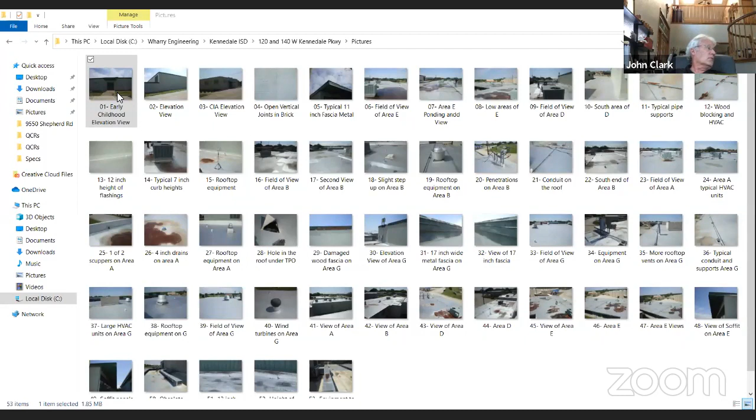Okay, let me try this again. I'm looking at share screen at the bottom of the screen. So that's what I would click, right? Yes, and then I think it'll ask you what you want to share. What do you see now? Oh, I think it'll say like screen 1 or screen 2 if you have 2 monitors. Let's see. Something's happening here. It's going back to the same thing. We're back to the same one. Okay.

I might have to get some help here. Just new share. So you're still not seeing it.

Okay, let's stop. Can you just take us through the process of what you went through as far as why this roof, and when we talked about picking the best roofs for what we have, why you feel like this is the best roof for what we need.

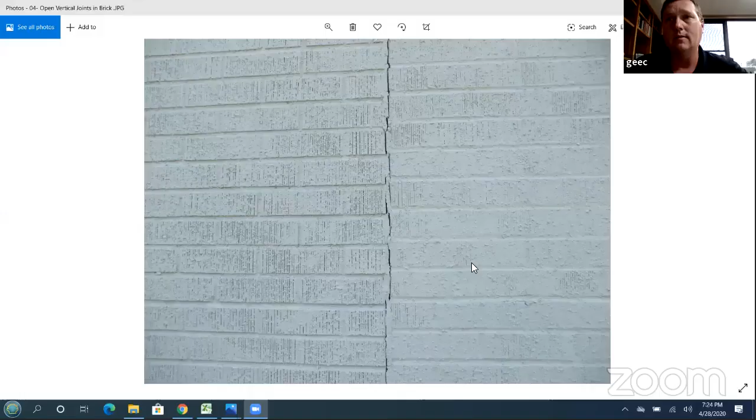They're the ones we contracted to create the specs and look at what they recommend as our best roofing system. Robert Gabois is on with us also—he was the one who originally came in, and when we were talking about the metal roof system, said you may want to get somebody else out here to look at your roof.

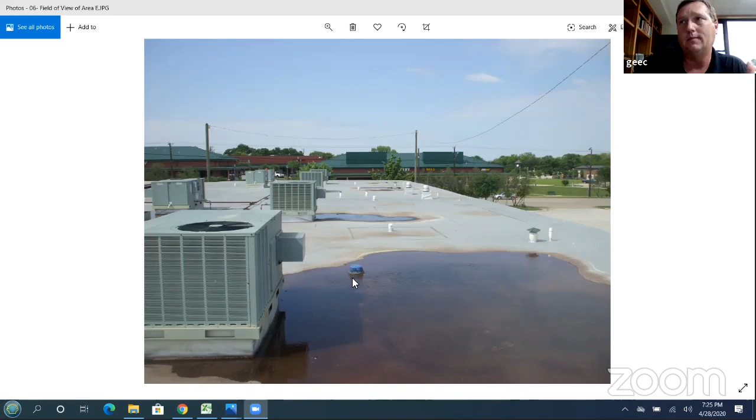He originally said you may want to rethink this, because as far as the weight of the metal roof, how compromised are these wood trusses? That's what led us into bringing in a roofing engineer to design what we need for these types of buildings.

As you can see, you have some cracks on the vertical walls, which we plan to address within our specs and drawings, to assess all of these vertical joints and cracks around the perimeter.

This is that area E I was talking about—I believe it's the pre-K section, on the end towards the playground, towards the hill up top. As you can see, there's quite a bit of ponding. The drain was dropped there, but it's not working properly either.

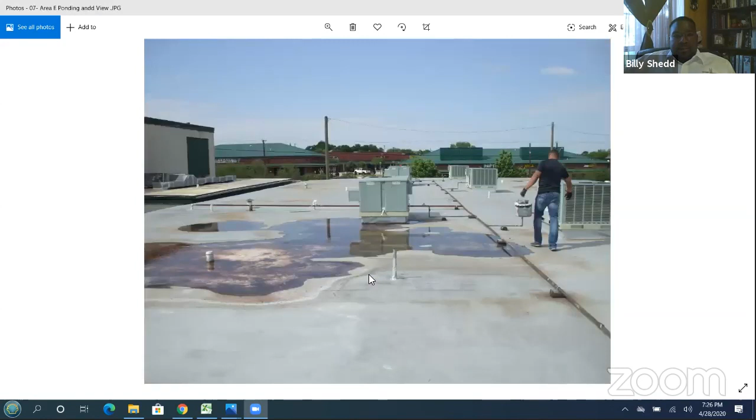These are just typical pictures. As you can see, these little spots and things here are typical evidence of water sitting there for quite some time, so the slope is very minimal.

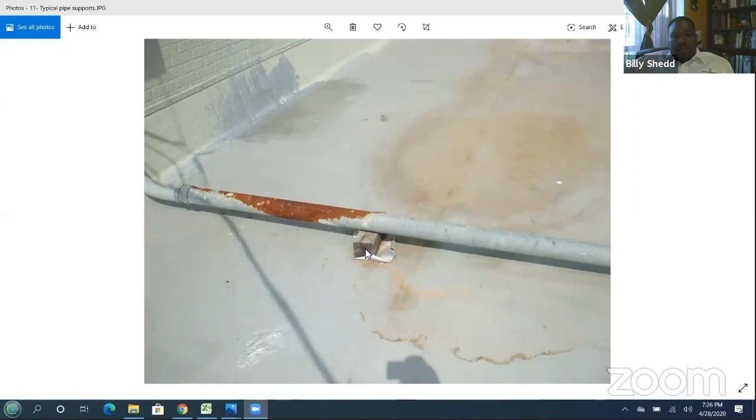These types of pipe supports—we're doing away with the wood because over time, like any wood, it tends to deteriorate and no longer supports the roof or the pipes and conduit. So we're going to actually put what we call pipe rollers underneath these. Same thing here.

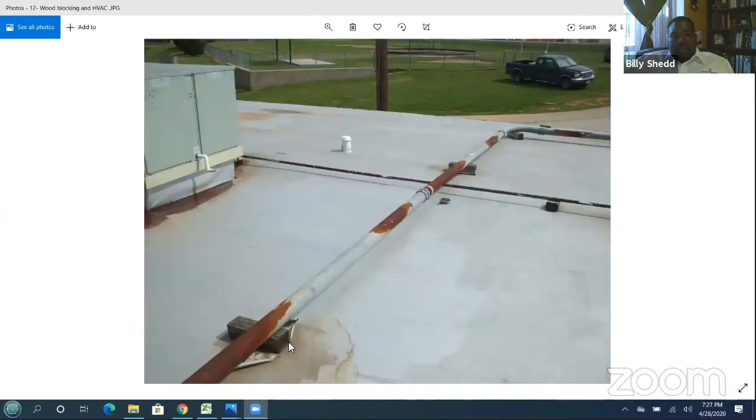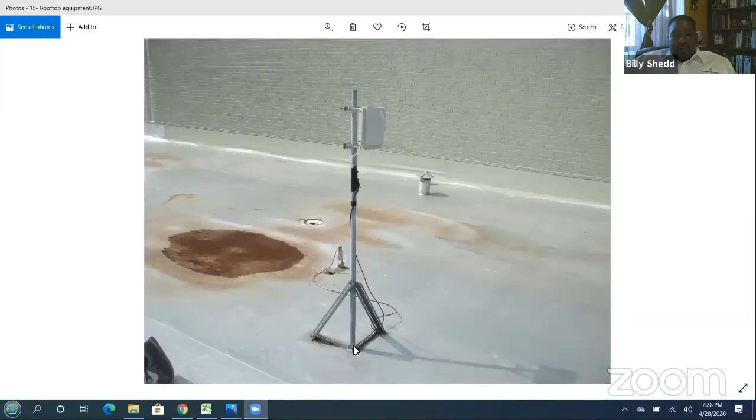I don't know what this is used for—we're going to have to remove it and reinstall it properly. Is this operable right now? Is it functional? Looks like an antenna, at our tower. Is it functional, or can we remove it, or is it abandoned?

Brian, are you still on there? I believe this is our connection from Delaney that ties in the CIA building, the admin building, the Success Center, and DEAP—we kind of have that daisy chained across. I believe that's our tower to achieve that. Our plan is to remount that on the side with Brian's rewiring, but we'll have to do a temporary drop.

That's not our equipment though—I honestly don't know what that is. It looks like we haven't installed anything on that building. I see coax cable going into it; that may be related to something like a dish for TV, is what that looks like.

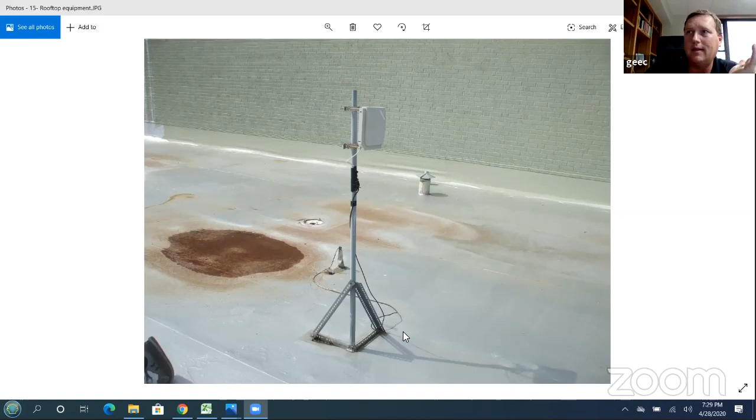Okay, well we've addressed this—WeatherNet services or whatever, the weather bugs or whatever. Possibly. Okay, well we've addressed this. If you want to put it back in place, pick it up, install a new roof system underneath it, and install it properly so when it penetrates the roof it'll be flashed properly so it doesn't leak.

So we've addressed this—as you can see behind it, there's a drain. We plan to eliminate that drain and install taper that's going to come all the way out to the edge, with new gutter systems coming out there. Another area.

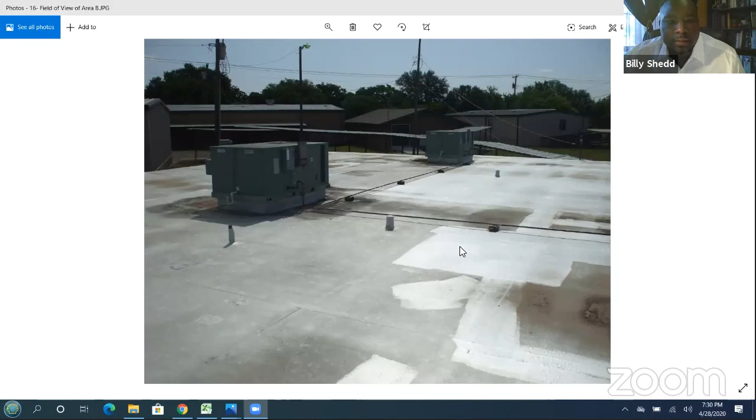Just to give y'all some ideas where you're seeing those lighter areas, that is where maintenance has gone in and tried to patch just to mitigate the leaking until we can get a new roof. Yeah, it's just a coating that they applied, I guess, to try to stop leaks temporarily.

As you can see, there's somewhat of an elevation change here. We've already addressed it in our drawings. Once we add tapered insulation, which is going to come out to the edge over here, it's going to line up pretty much perfectly, so it all slopes towards this back wall, all the way to the edge over here and back to this side, so you'll have gutters pretty much all the way around this area.

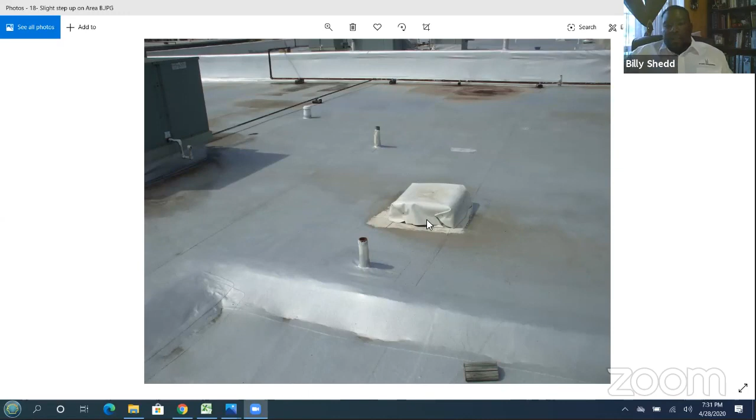Things like this, which are abandoned, we plan to remove and install wood in place of it, because of course it's no longer being used. We don't want that being a possible place for intrusion of water. So we're going to just eliminate that all the way down to the deck and install wood to cover that hole.

I believe you said that this is inoperable as well. This is abandoned. Okay, so I think I have this on our drawing already to eliminate that and install wood. Yeah, I think I have that already to eliminate that as well.

These, of course, have to stay, so we're going to get these flashed properly. They're going to look pretty similar to this with liquid flashing, so the contractors know how to work around this. They work around them quite often. Wood blocking, we're going to replace once again.

This is the area that's closest to the main building. I guess 120 West Kennedale is closer to that. So this is the only area that we have with parapet walls. This roof will actually be, it's already tapered or sloped this way, and it's going towards some scuppers in the walls over here. We're going to eliminate that drain, and I believe there's another one on this side we're going to eliminate as well, so the roof can drain properly towards this wall.

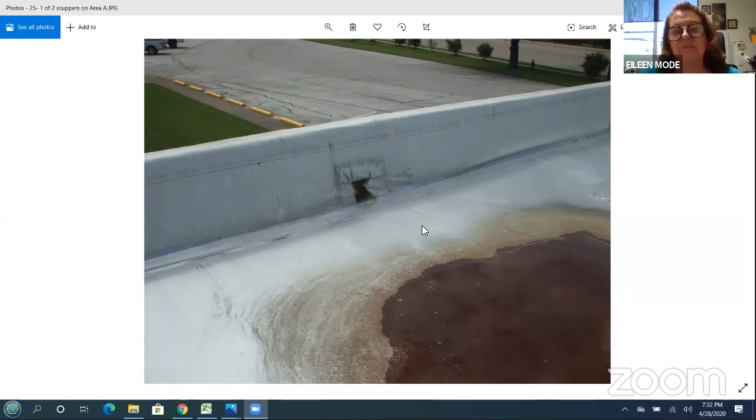As you can see, that drain isn't even working properly. The water's on this side of it instead of going there. So that's why we plan on eliminating it.

Just typical rooftop equipment.

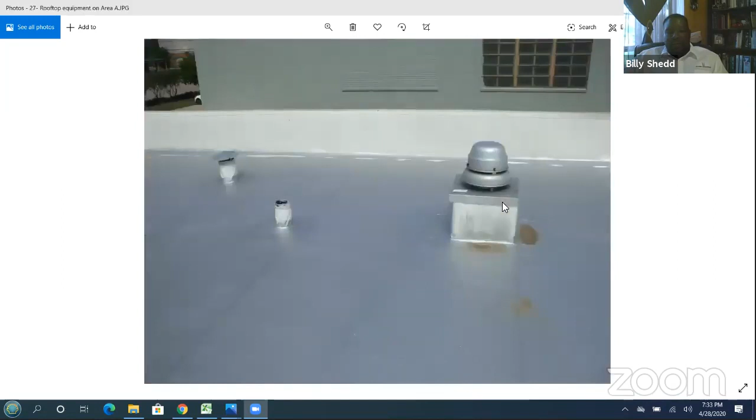This actually, I showed Ms. Mode this. One of my guys actually walked across the roof, and his foot kind of fell into a hole. This was actually covered, and so I had him cut it out. We believe that the last roofer on this roof actually just covered this hole — it was just like a piece of insulation sitting in there. We felt this in different areas, so when this roof is removed, we're going to have the contractor cover all of these holes with actual wood instead of being just an open hole there, because the hole is big enough for a foot to go completely through the roof.

So how many roofs did we say were on top of the CIA building? There's two — but if you count this silver coating, it can actually be referenced as another roof because it's actually recovered. They actually covered two roofs on this, so if you really look at it, it has three roofs. It has the built-up roof with the modified bitumen, and it has insulation, then the TPO, then they coated this. So there's actually really three roofs on this.

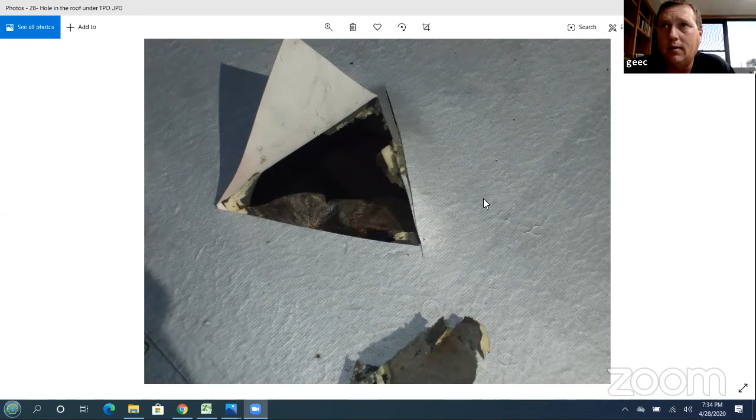The plan is to strip it down to the decking and go all the way down, completely redoing the decking where it needs to be done — that's where it's compromised. Only in areas where the decking is deteriorated or rotten, we plan to repair all of those and install a new roof system on top of that.

Can you kind of show the difference in the two halves of the CIA building, like where the really bad parts are compared to the parts that are not so great? On the CIA building, pretty much they're all the same on pretty much all of them. Area E, which you plan to demolish anyway, is by far the worst as it pertains to slope and drainage. The slope on that is very minimal, so it's holding a lot of water. The other areas are holding water too, but not as much as area E.

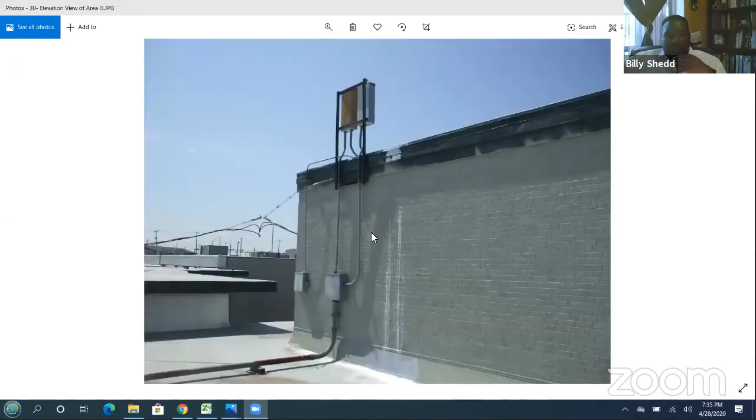But actually, when we cut those roof systems, we cut each roof system — wish I had... let me see if I can find an actual example, let's see.

I want to go back to one of the things we were looking at, Billy. Of course you and I and Mr. G have already talked about this, but let the board know the difference. The pre-K wing is significantly more damaged.

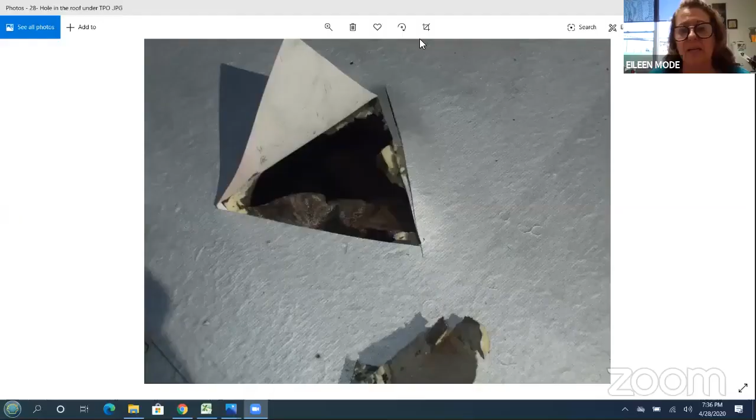If you think about how the administration piece of the pie, the plat of it, kind of all runs down towards Delaney. All the roofs, as you've seen, the drains on the roof are not working correctly. All that water is sitting on that pre-K wing, and it's soaked. The insulation is soaked, the wood is soaked.

That's where later on we've asked you if we can have permission to tear that down, because the cost to replace that roof is going to end up exceeding what it would cost us to tear it down, since we'd have to replace so much of the decking. It would be easier to tear it down and use that space for something else versus trying to re-roof it.

Most of these areas here where you see the water, I didn't want to cut because there was really no way to patch it back properly without it leaking. But even in areas close to there, we cut a hole in the roof closer towards the street, and the insulation was so saturated that I could squeeze it like a sponge, and water just came flowing out of it.

So there's water trapped in the system. We also found that in all the areas we cut, we actually found wet insulation on the entire roof.

And these pictures were taken a week after the rain we had? Yes. So that pre-K wing, you see how much water's standing on it? Actually, ponding in the roofing world is considered when water is standing past 48 hours, and this was a week after. So this water is probably still there, and would probably still be there even if it hadn't rained for a few months.

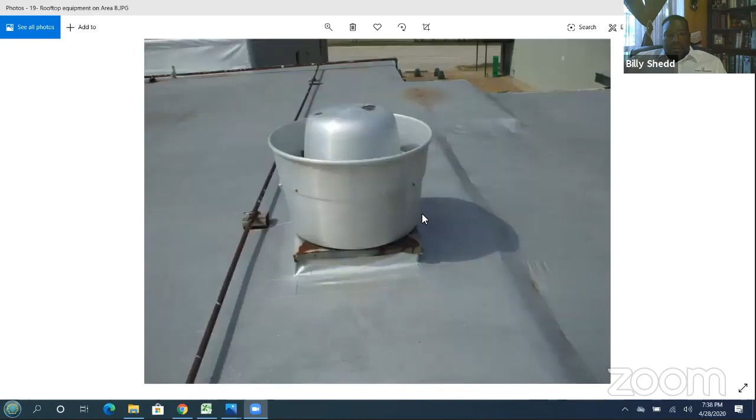This is the actual roof on the gymnasium, I believe.

Like I said, this roof was coated as well. It has the same amount of roof systems as the others, all of them do. It's just rooftop equipment.

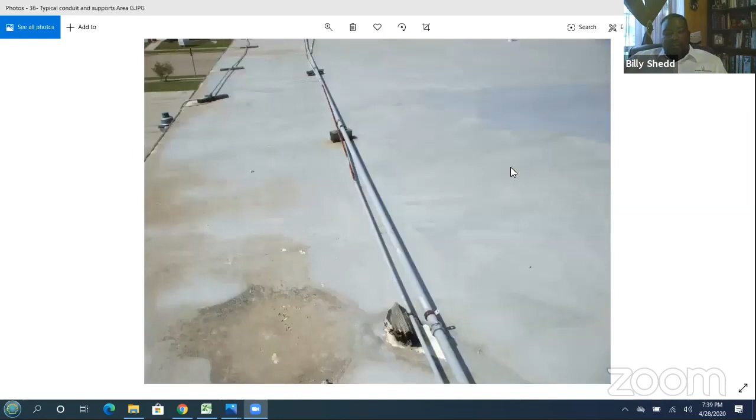We plan to bring a gutter around this roof too. We have to raise all these large units, which the contractor will have in their cost. This equipment is too low, and as you can see, the curb is only maybe 2 or 3 inches.

And do we even know if that equipment's functioning there? I don't know, that's something Kennedale ISD would have to tell me. I'm talking to Ms. Mode on that one. I believe it is, that's part of the air conditioning units there on the gym, and both currently work. The heat is separate, it's a heater on the inside, not part of the HVAC on the roof. Okay, so they're separate.

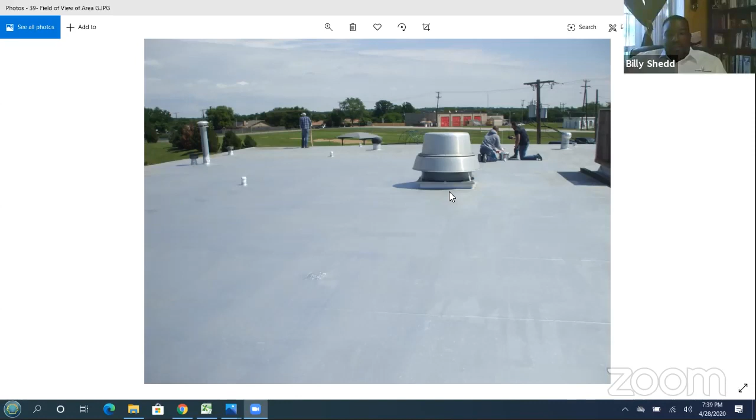Someone added some turbines up here for ventilation, I don't know if that's proper. We may just eliminate that and add some typical commercial style rooftop ventilation instead of these turbines. Those are installed over the stage, the old stage.

It's just an overview of your roof areas.

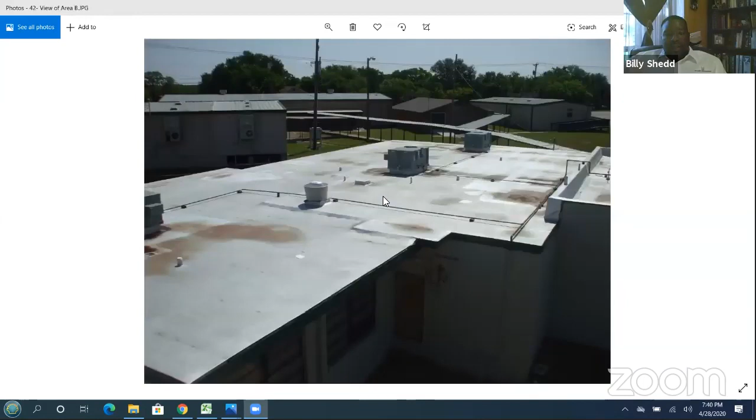Do you have this broken down cost-wise, what we're looking at for the CIA building in sections? For the most part, I believe. I had area E, which I call this area E, broken down away from the rest of the roof systems.

And that's the pre-K wing, just to roof that, what was the total? Hold on one second, let me get out my pen, putting you on the spot here, sorry Billy. It's okay, that's okay - $400,000.

I think I had that with just the roof. This area would be in the range of 173 to probably $200,000, just to re-roof this, add the tapered insulation, and lift all the units and whatnot. So I think just this area alone would be about $200,000.

That wasn't included because we don't know how much wood decking needs replacing. They anticipate 2,000 square feet will need to be replaced, and it could be more. I added that in the specs, that at least 2,000 square feet, the contractor should include that in their bid.

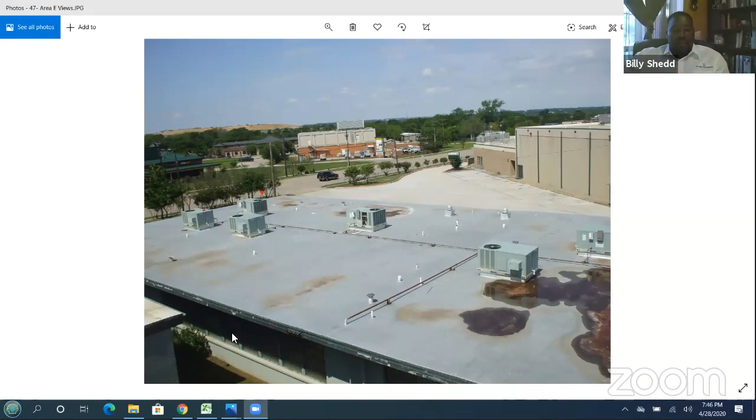Yeah, I know the gym is original. I know the windows on that building don't even open - they're sealed shut, and they're definitely not low-E windows. They're single pane, so you'd have to bring those back up to code, since right now you have to have double pane with low-E. So you'd have to replace every window and all the wood around them just to bring that up to standard.

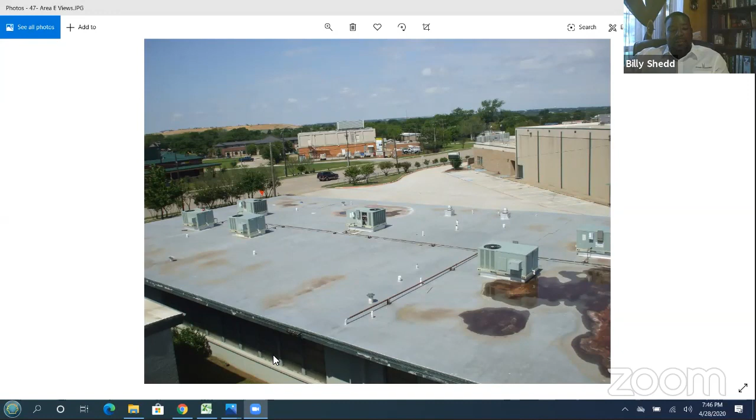Also in this same area, as you can see, there are some soffit panels, and all of that stuff is deteriorating. I believe the wood underneath there is deteriorated as well, so that will have to be replaced.

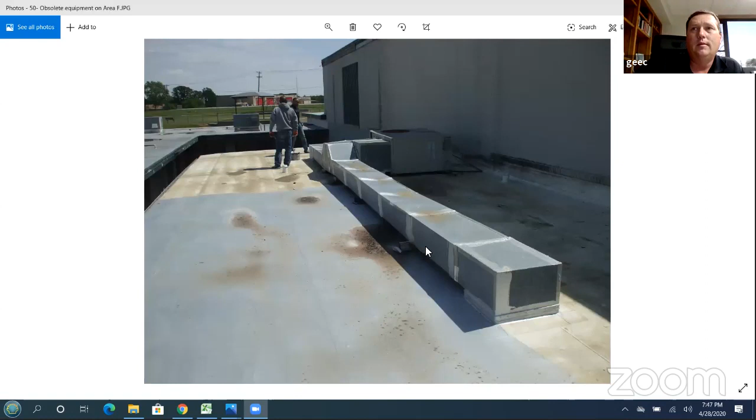All right, we ready to move to Delaney? Yeah, okay.

Stop and share, let me go find Delaney's pictures. Delaney's doesn't have near the damage, it just needs a new roof. It's old, it's got leaks in it, but we don't anticipate the deck damage we're finding in the CIA and the pre-K hall. I believe it has a metal deck on it. Is that right, Billy? As opposed to the wood deck on the CIA building?

That's correct, it has a metal deck, but on that roof system, let me show you where we are. Let's see if I can share my screen.

I want to show you where we are, Delaney. Can you see my screen? Yes. Okay, this is where we are, we're at 75%, which is basically complete, we're just doing a final review. So these are your roof areas.

I have them all labeled. I did the lettering on my own so I could identify all areas. So of course A would be the gymnasium. We have area B, around this complete area, and D and C. Now C and D are a little weird.

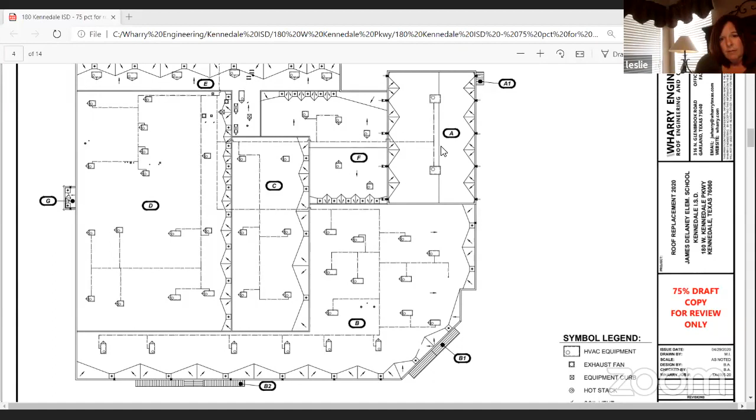So the gym was there? It was, yeah. C, I guess that's A and F, they were there. It's all this B and stuff that was new. B and E, E was the newest section, I believe, when I saw a set of drawings. Yeah, they basically wrapped around the old building, kind of added around the edges. And this used to be the front of the building, right, where G is? Yep, yes. And where B is, it used to be a playground.

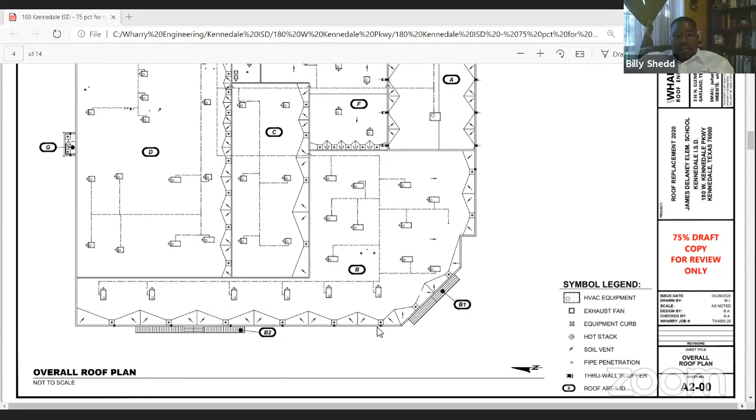That side, the back side of B, over here? No, oh over here, by the door part. Yeah, yep, A wasn't there. Okay, we just had D and C. B1 and B2 have metal roofs on, and they're damaged. Y'all didn't have a gym? Mm-mm. As long as I've been there, A's been there, but yeah.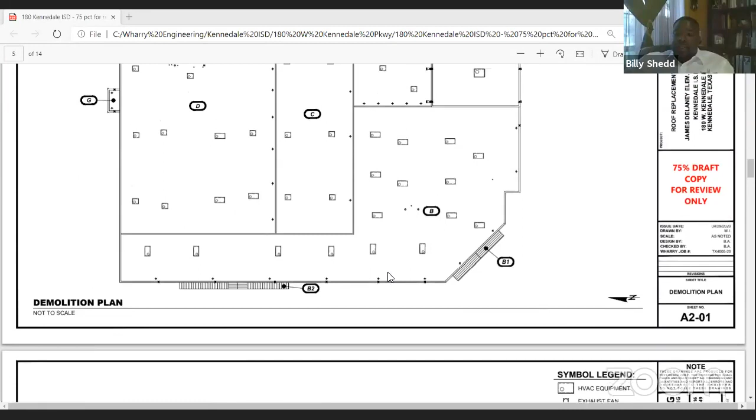Billy, would you unify that roof when you do the new roof structure on there? What's that, I'm sorry? Would the roof still be thought of in sections like it is now after you do the re-roofing? Well, this is for me, this is so we can identify the areas, and it makes it easier for me.

So this is my lettering process. I just broke it down so I could analyze each one of them. I can itemize the issues on each one and address all details. So this is what I did on my own for me. I got you, I'm just thinking in terms of grading and watershed. You mean for the drainage?

Actually, this roof system, what I found is that I cut it in different areas. Say for instance I cut it, these are the low points where you see these drains. These are the low points, and these are the high points of the roof because it drains this way. So I cut it in different areas, the low point and high point, because we don't have any as-built drawings for me to actually reference to see if there's actual structural slope in the deck.

So once I cut it, it let me know that there's actually structural slope in the deck. So all we'll need instead of a fully tapered system is insulation in between the drains. So once the water comes from the high point to the low, it'll go directly towards each one of these drains in this fashion, so we don't have to add a completely tapered system like we do on the CIA building. Gotcha, that makes sense.

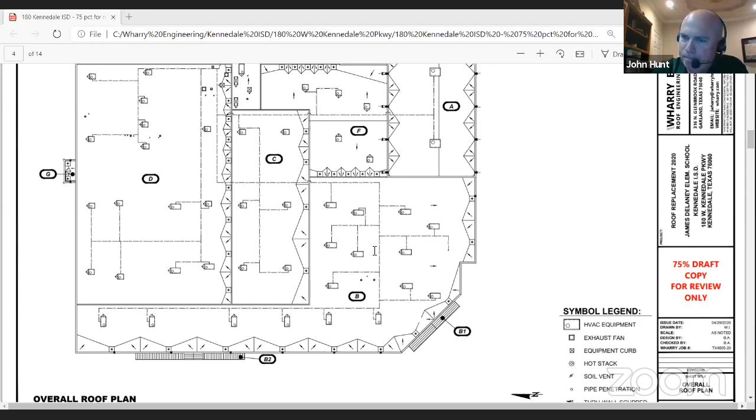It actually has pretty good slope. I'll go to the picture shortly, but we don't really have a lot of what you see, like you saw in the CIA building - a lot of ponding and stains on the roof that are indicative of ponding. You don't see that on these areas, so it has good slope.

However, when I cut each roof area so I can analyze each area - I cut area B, C, D, each one of them - I found that the insulation was wet on most of these as well. So there's water trapped in between the system. The top layer of this roof system is a TPO 40 mil, a very thin system, and underneath it doesn't have a hard board, just a thin layer. It has 2.8 inch ISO insulation underneath it.

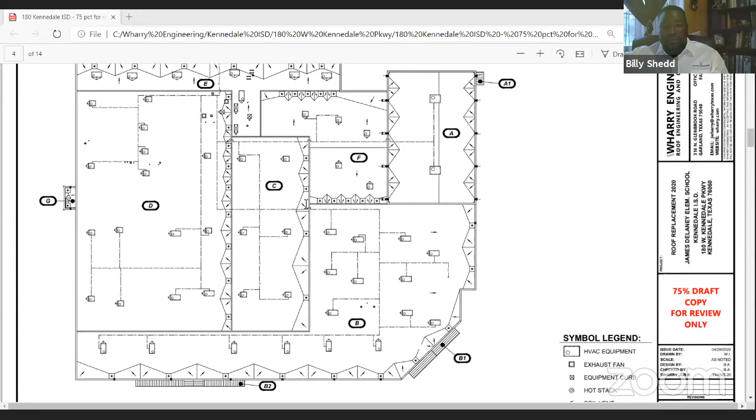And some of these areas, like C and D, C, D, F, and A, actually have more than one roof on them. Let's see, I do have that.

And those old roofs are gonna have to come off, right? Yes, because we have water trapped in between the system right now, so we don't want to overlay anything. We want to analyze the metal deck to ensure there are no holes or rusted decking that we're installing a roof system over.

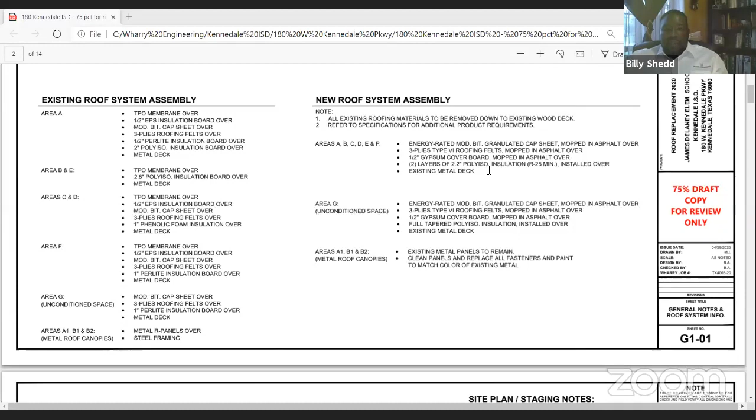So this is what your set of drawings will look like. I think this set is about 14 pages. We'll have the general notes, which will tell you what each area has, and this side is the new roof system that we're proposing should be installed.

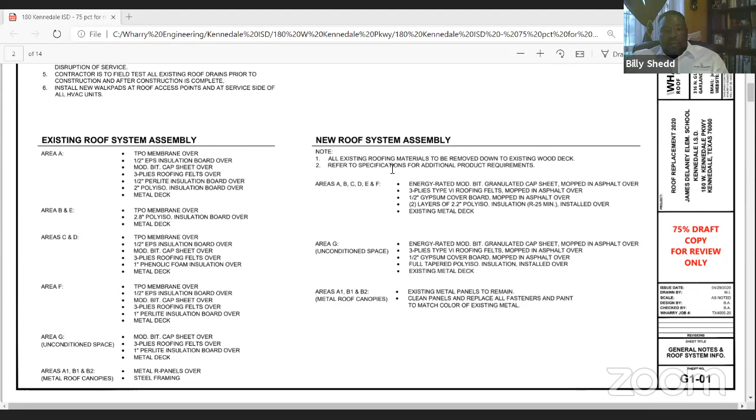Going down, we have a site plan, overall roof plan, demolition plan. Then we start enlarging the areas and showing partials so you can get a better view of each area.

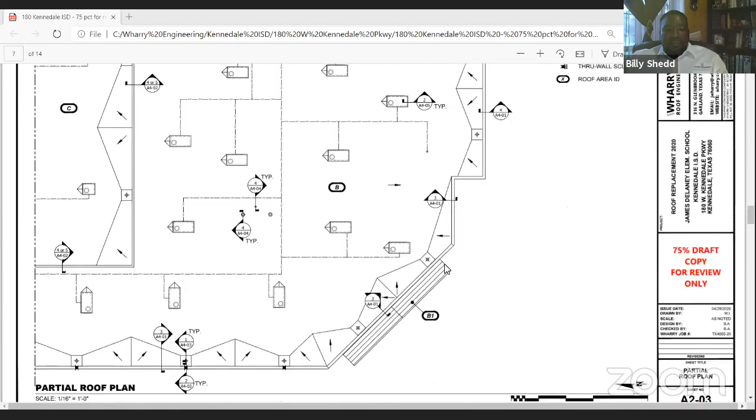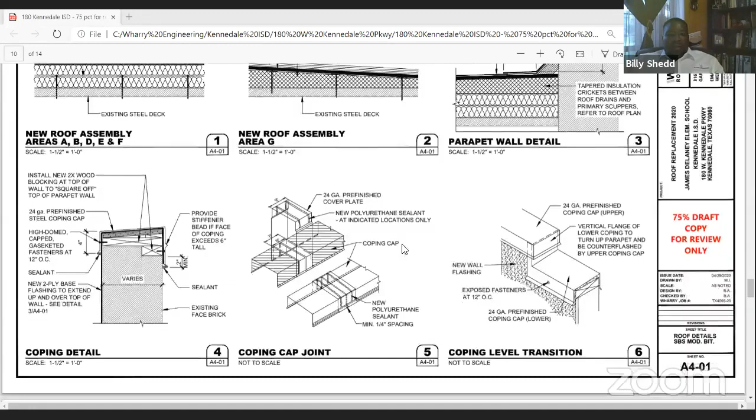Then we get into our details. We have a detail for every issue or every area on the roof, as far as the walls, coping cap changes and elevation changes, wall flashings and wall details, expansion joints. So we've identified every issue and everything on your roof - there's a detail for everything that happens on the roof.

Okay. So do you want to see the pictures on 180 on Delaney? Anybody feel like you need to see the pictures on it, or do we want to move to Arthur? Let's go to Arthur, that's good.

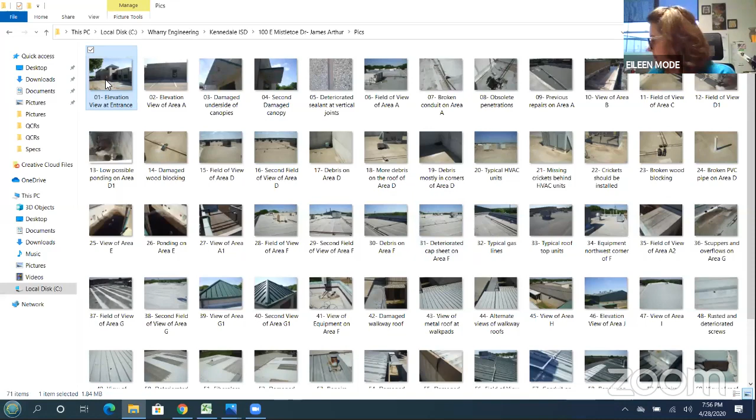Okay, so Arthur - of course we haven't started design on that or anything, but we did do an assessment. Let me go back and find that. It was also included in the board book. Can you see Arthur? Yes, okay, all right, let's see if I have it.

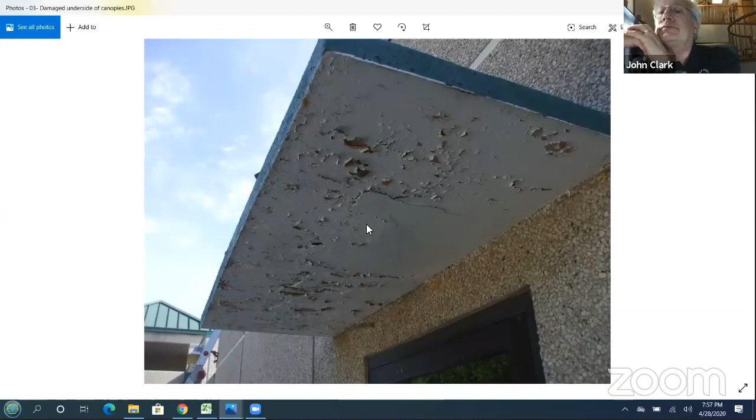Okay, this is what I call area A, I took a picture of this. This is this little canopy, and there are two - there's another one to the right. As you can see, it's starting to deteriorate and possibly cave in at some point, so these will need to be addressed at some point. That's the other one.

These are the vertical joints in the stone and the wall panels that were included in the specs - to actually cut the existing sealant out, grind this out, clean it thoroughly, and install new backer rod and sealant in these vertical joints.

Okay, this is the typical roof system on area A. We didn't cut it or anything because we haven't moved forward with design, so we just did a visual survey to let you see the roof system and what condition it's in. It's in poor condition. I don't know how long ago, but I can tell someone's been along this, I believe south wall - there have been some repairs.

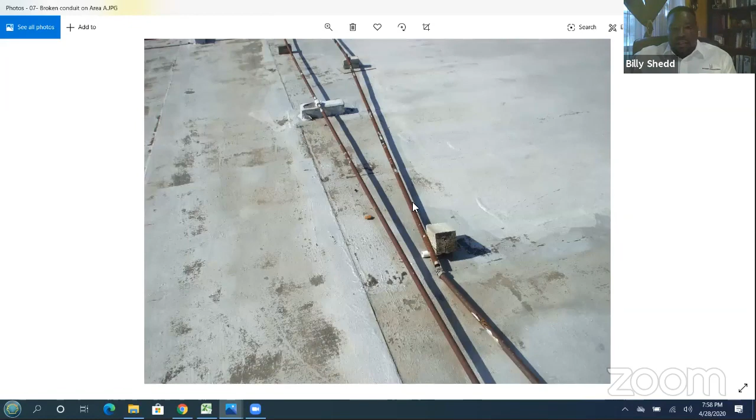As you can see, we have a lot of broken conduit. I'm not sure if all of the actual units are operable, but you have a lot of broken conduit, so some of this stuff may not be working anymore - AC units, I think that's the electrical conduit.

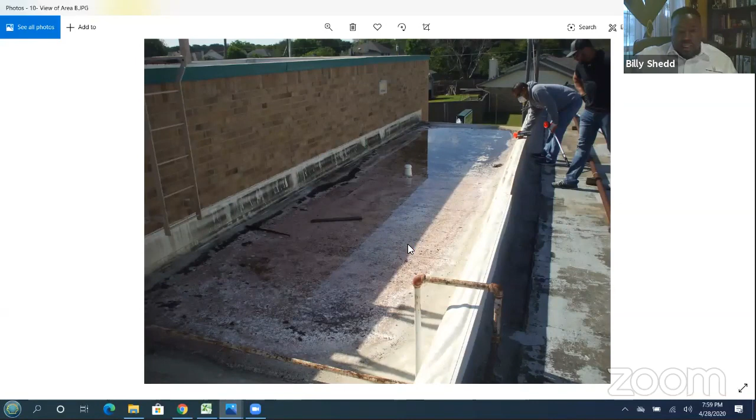Okay, we're moving over to what I call area B, a small roof. This is a different type of roof system than area A, actually a TPO roof system, single ply. As you can see, it's holding quite a bit of water. It was never sloped properly. It should slope towards this end, where I believe there's a gutter. So we've included replacing this roof and adding tapered insulation so it slopes properly and water doesn't sit on the roof anymore.

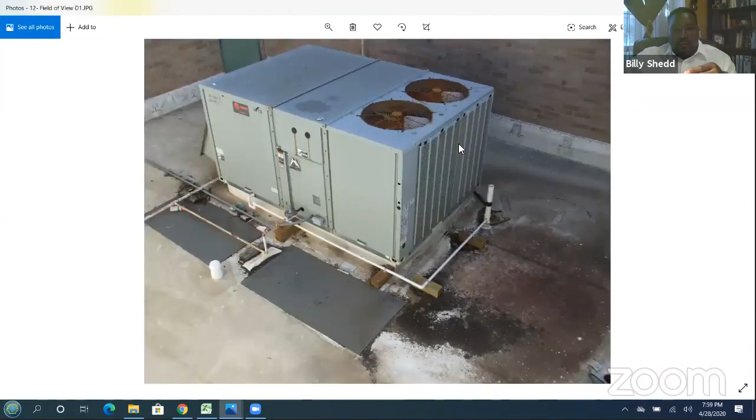This is the next area, area C. We found it to be in fair condition. We believe that...

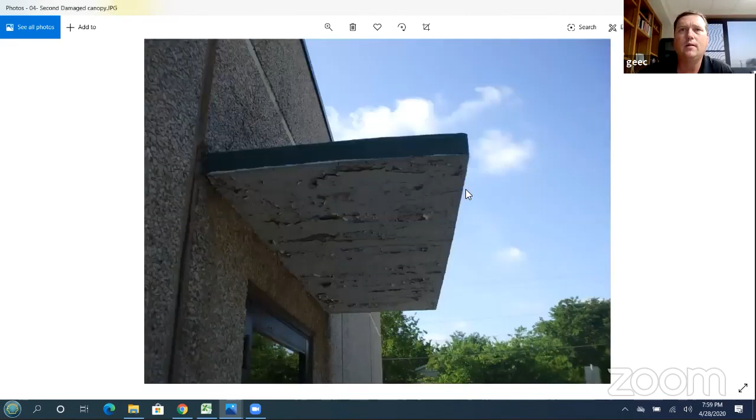Hey Billy, where it's puddling there, it looks like a swimming pool. Can you talk about the quality of the vinyl or whatever it was that they used? I think it was on the CIA building as well.

Yes, I don't know what millage this is, but it's TPO as well. Since we didn't cut it, we don't know exactly what's underneath, but from walking on it, I could tell it doesn't have the hardboard. Typically on TPOs, as a matter of fact I was in Joshua, Texas today with a contractor talking about ponding water on TPO roof systems. It's pretty bad for a TPO because eventually the water will begin to eat away at the roof system, more so than other roof systems. Ponding isn't good for any roof, but it tends to eat away at this type faster, making a red algae that deteriorates the roof at a faster process.

We found this area C to be in fair condition, so we didn't have to replace it, though it might need some minor repairs. But if you have it in the budget to replace it, we'd suggest going ahead and replacing it with the same type of roof system we're doing for the CIA building, as well as Delaney.

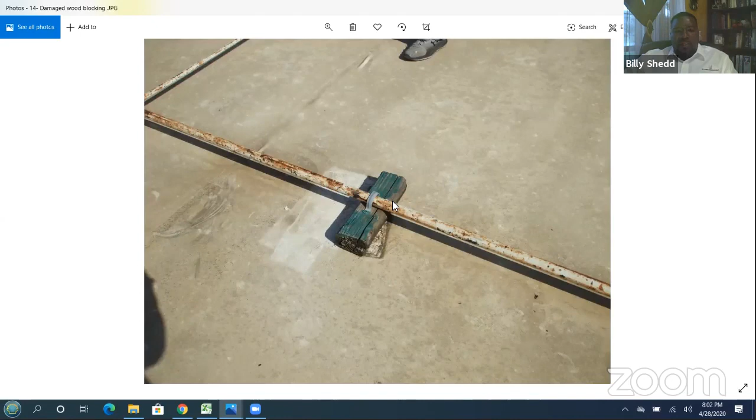Of course, wood blocking, and I showed you those pipe rollers we plan to replace. This is the newer section, which I call area D, I believe. But we found there have been some repairs on this, and I've been told there are a couple of leaks on it.

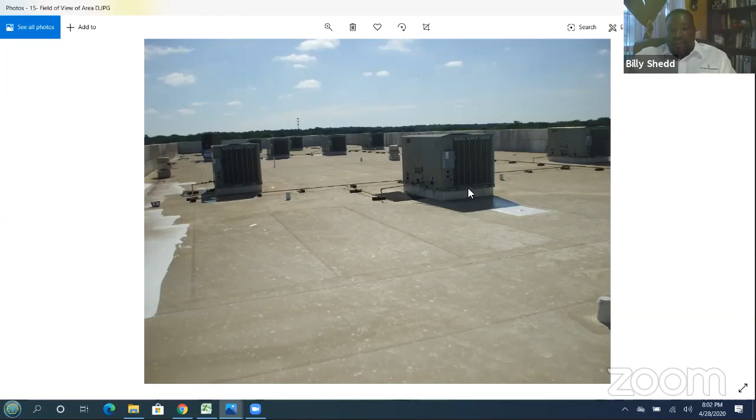The problem with this area is that behind these units, on this back wall, the roof slopes this way because of drains and scuppers. The deck slopes this way, so water automatically goes that direction. However, on the back side of these units, you have a lot of debris on the roof as well, and in the corners.

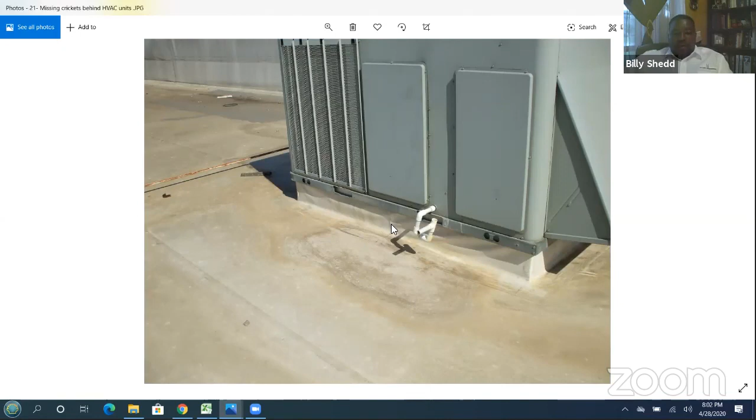Okay, this is a good picture. The roof slopes this way. Normally you should have a cricket - wish I could draw it in for you, let me see if I can. Yeah, I can't draw it in there, but normally you'd have a cricket, which is insulation that would divert the water to one side or the other. Right now, the water just sits behind this unit, and it does it for all units.

The same thing happens for all units on this roof - they don't have a cricket to shed the water off this area. Water just sits there for, I don't know, maybe 3 or 4 days.

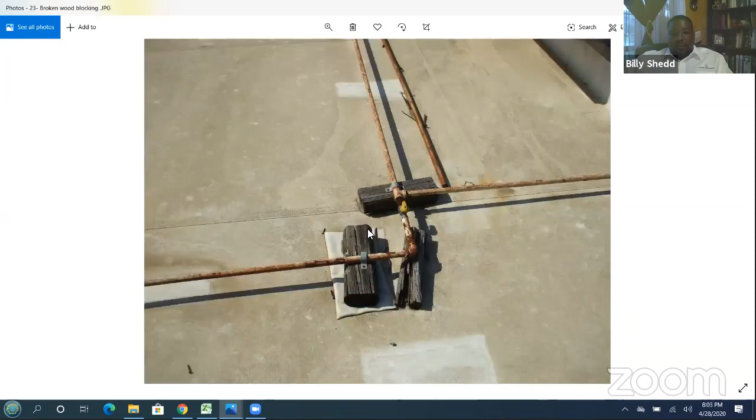With blocking, we actually found that this pipe was broken, so I'm thinking there's a leak there that needs to be addressed. Someone just tried to repair that temporarily, and that's on the same area. I did have a budget in there to repair the roof as well, which I feel that if you re-roof those other areas I suggested, we can get the contractor to address any issues on this roof, including in their bid to repair any damages.

At this moment, I don't feel we need to replace this roof because I believe we have at least 5 or 6 years worth of life in it. And if you were to do some more repairs, like the ones mentioned, you could extend the life for another 3 or 4 years, buying you time to replace this roof later down the road.

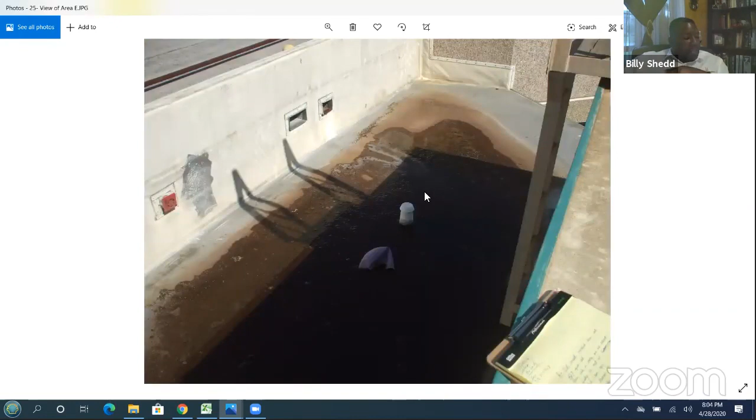This is one of the bad areas, which I call area E. As you can see, there's quite a bit of ponding and the water's not getting to the gutter along this side. The water is just sitting there like a pool. Also, this ladder is coming out of the wall, so I have that in my specs and drawings to reattach it because it was pretty loose. These are little small areas that need to be re-roofed, just small sections.

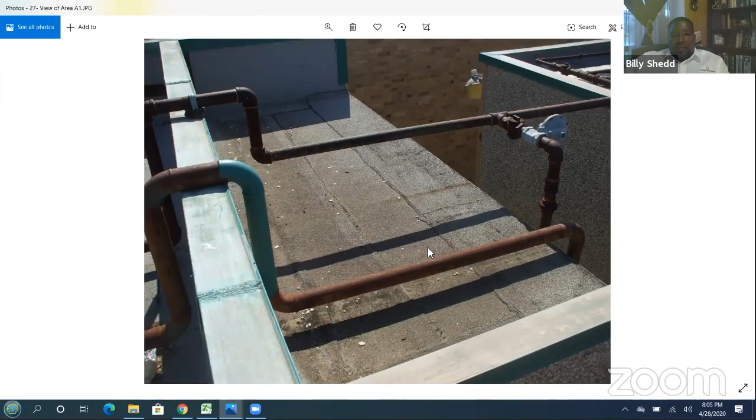Okay, so talking about life expectancy, what are we looking at with the proposed roof system on these buildings? If we replace them, we're looking at 20 more years.

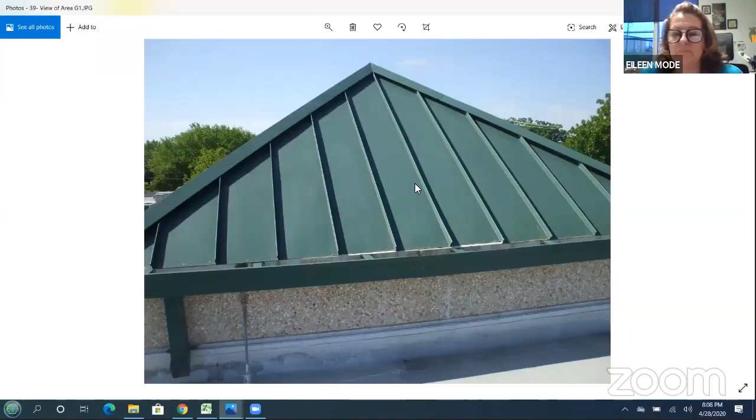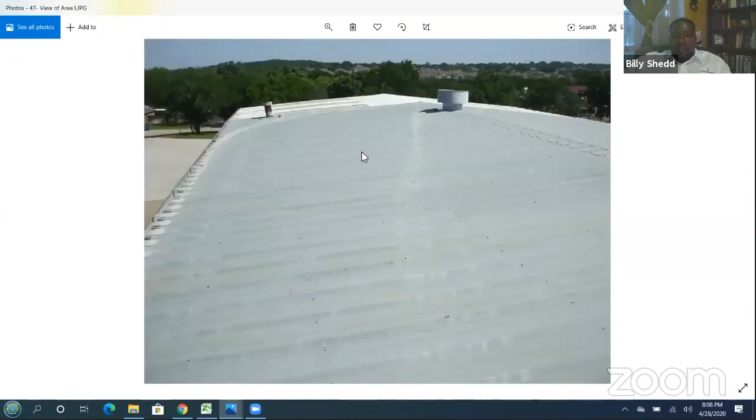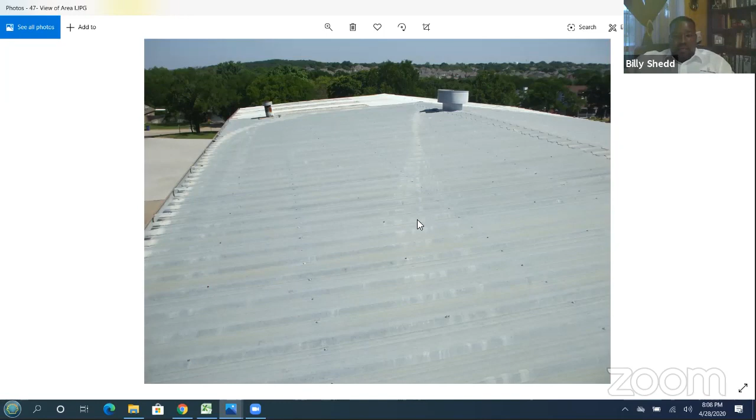This is, I guess, the music room. It was the original gym, now it's a music room. This roof system has been here for quite some time. The idea is to replace all these little fasteners you see, because they normally come with a neoprene washer, and over time that washer has deteriorated, allowing this roof to leak in several areas. So we plan to replace all of these fasteners.

As you can see, there's a fastener that's rusted, and someone has tried to repair them. These skylights, there are 6 of them, we plan to take out since they're not being utilized or necessary anymore. We also plan to take up all of these panels since most are damaged as well, install new panels, and coat the entire roof system.

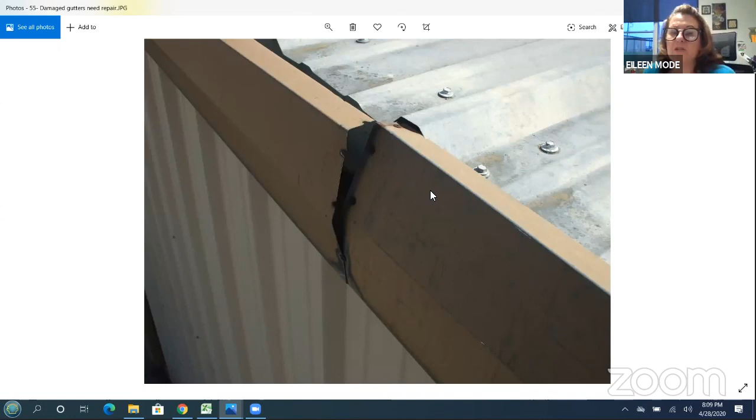As you can see, these panels are damaged, and on the skylights you can see the actual fibers in the panels, so they need to be taken up, they're very brittle. The gutter is also probably going to have to be replaced, it's damaged and broken. This is the original roof that was put on this building when it was built - I don't recall if it was 1976 or 1978 - so it's the same roof that has always been there.

And we'll go to the last one, to the large gym. As you can see, there's been quite a few repairs. Because this roof is already green in color, I don't feel that we need to coat this roof.

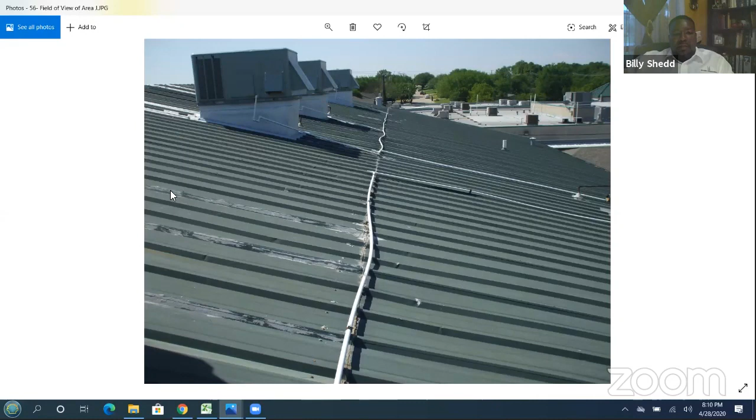I just feel like it needs some care. Some of these screws need to be replaced. We need to address some of these laps that are probably leaking. I know this roof is leaking because someone has tried to repair it along the seam. So all of this stuff needs to be cleaned away, and new sealant and new tape needs to be installed to stop the leaks in these areas. As you can see, someone tried to coat it for repairs.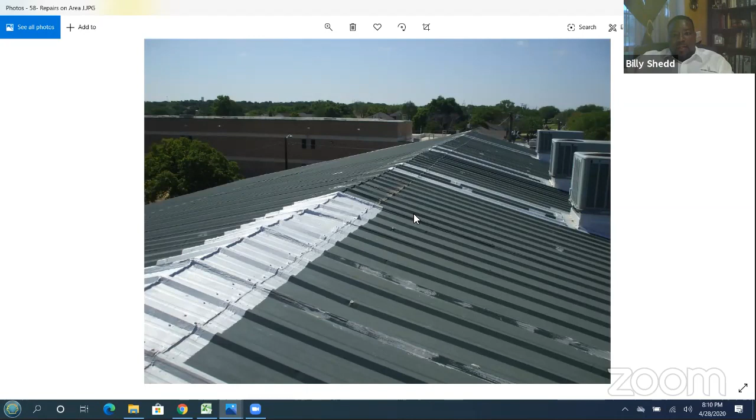And I'll fast forward to Y, just the slope of the roof. You can see there's more repairs. The insulation is falling inside because it's leaking, in various areas.

So if we get the contractor to address all these issues on this roof, we should be able to reinstall new insulation, because I think this insulation is pretty much gone, but a lot of it's still in place. We'll be able to install new insulation there. And of course, the vertical joints around the entire school, plan to address those. They're all open.

That's the end of my pictures for Arthur. Is that where the water's coming in at the front of the building? Possibly. Gaps? Possibly, yes, possibly.

Quite possibly. Because these are actually tilt wall panels, and they come together, and this is the barrier which stops water from infiltrating the building at these joints where the panels come together. So they're all open. This will be addressed along with the roof system.

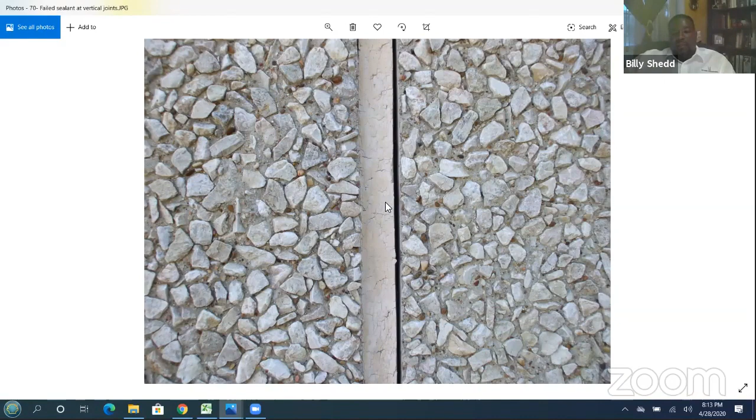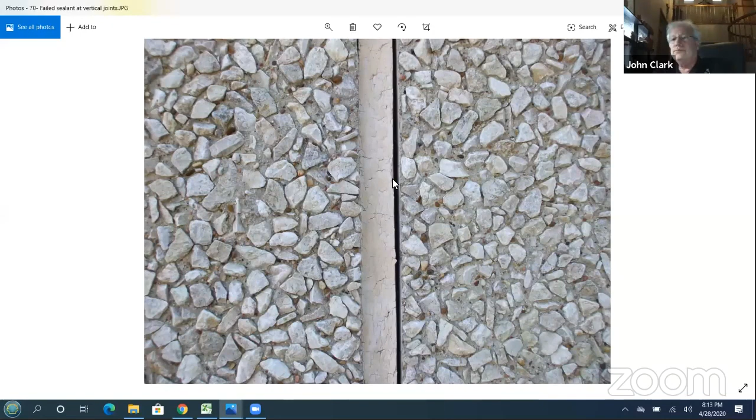Okay, do you have any questions for Billy? I don't have questions about cost when we get there.

So we're saying not the metal roof, correct? No, not the metal roof. It's going to be too involved.

Like I said, once again, if you look in your attic at home, you'll see trusses and rafters. We'd have to install that before you can install a roof system. And of course, that adds to the weight factor, which means we have to get a professional engineer involved in calculating the weight and whatnot.

Plus, you have rooftop units. Those would either be covered or you'd have to lift them up above that and add supports for them to sit on, or you'd have an AC maintenance person stooping down underneath there to service all those units. It'll be a nightmare. Thank you.

When we originally were talking, we were looking at doing the CIA building and Delaney. We now asked Billy to look at our other priority roof, which was Arthur. If we add this, we'd be adding it to the scope of work. So that is what we're asking, if you want to take action on that, we'd have you take action on it tonight.

But before you take action, I didn't know if you wanted to go into the other item—if you don't have any other questions for Billy, then we may move into considering options for the pre-K wing, which would mean bringing in Robert to speak about that before we take action on anything.

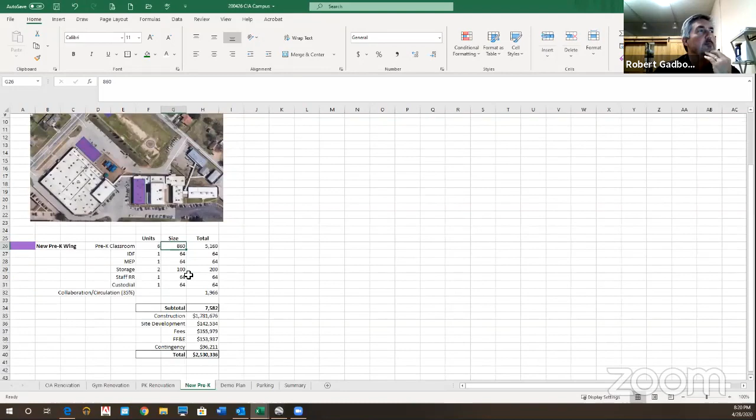That location there really intrigued me. It obviously does take some parking, but I'll address that a little bit. One of the other options we discussed was putting it up here on the hill. It's certainly a possibility, but you have a pretty sharp elevation change from the field down to the parking area, so ADA access, student drop-off, pickup, and all that would be a bit of a challenge to deal with. But for 6 classrooms, brand new, tax, title, and license, we're looking at about 2.5 million to replace the 6 classrooms you have right now in the pre-K. And I'm not even sure 6 long-term is a viable option.

As a facility planner, I feel a responsibility and I kind of enjoy getting down into the weeds. So we went back and looked at, and are currently evaluating, your enrollment and utilization of Delaney, Patterson, and Arthur in terms of available spaces, capacities, and where we might find some room.

Preliminarily, it appears to me you have room within your existing campuses to bring pre-K on board. Now, it's in Delaney right now. Delaney still has a little bit of breathing room, but if you're going to go to a full day program, you're literally going to have to double the number of your classrooms that you have.

So what we're doing right now is an analysis across the board for all of your grades and all of your campuses through 8th grade to see if we might find a responsible utilization of facilities that is also responsive to your demographics and how your community is laid out, because we don't want to create a scenario with multiple elementaries where you have some haves and some have-nots. But we also want to be mindful of instruction and vertical alignment, taking every advantage we can to bolster that instructional environment for the kids. So that's a lot of gibberish to say it's not all about the sticks and bricks. We want to make sure we're making the best long-term decision for Kennedale ISD kids.

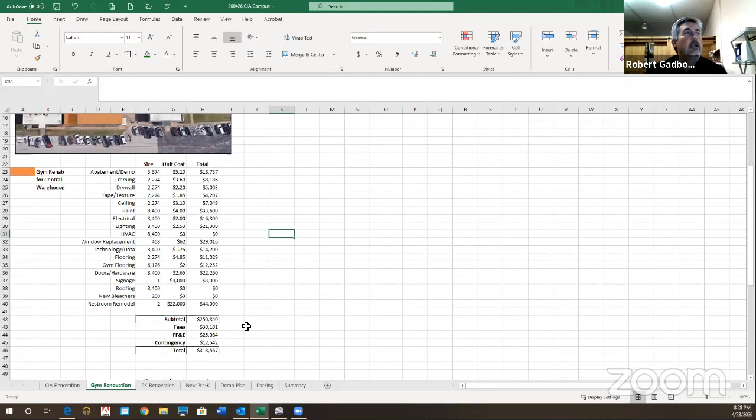But the gymnasium, there's some real possibilities to taking this space, demolishing the old dressing rooms over here, but providing a central warehouse facility for a little over $300,000.

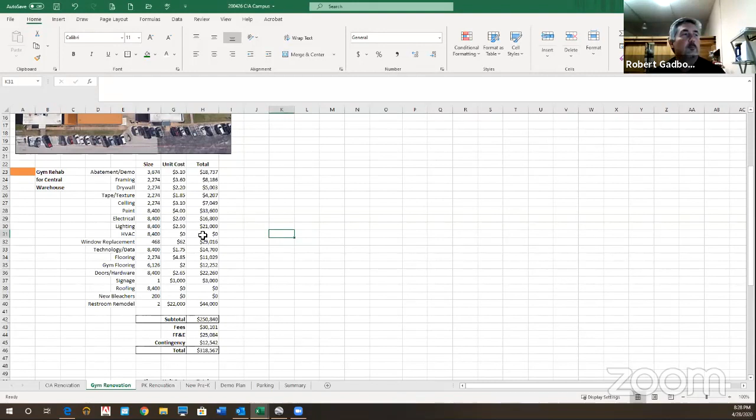Now, this estimate does not include the roofing because I know that's part of your claim, and you guys have set some money aside for that. And it doesn't include air conditioning, and I know that's probably making Ms. Mode squirm a little because they are old units. But I wanted to give you a quick option that would allow you to exploit that facility as is, and then perhaps put capital dollars into the HVAC units when those things give up on you down the road. But I think we've solved a couple problems there for not too much money.

And then finally, we looked at a reconfiguration of really the whole CIA building, if you will. Right now, I think your maintenance folks did a pretty good job of going in there and dividing those spaces up. But if you've been through there and maybe grab your cup of coffee in the morning and hit a light switch, you realize you're turning on lights in 3 or 4 different offices.

And some offices have air conditioning supply, some offices don't. Some offices have a supply but no return. Your guys tried to make do with what they had.

And I think to go in and create the optimal utilization of that facility to support what is a very important component of your student community, and those kids that are in need, modifying this facility to support those functions is a short and long-term practical solution. But to do that, I think you need to do it in a little more structured manner.

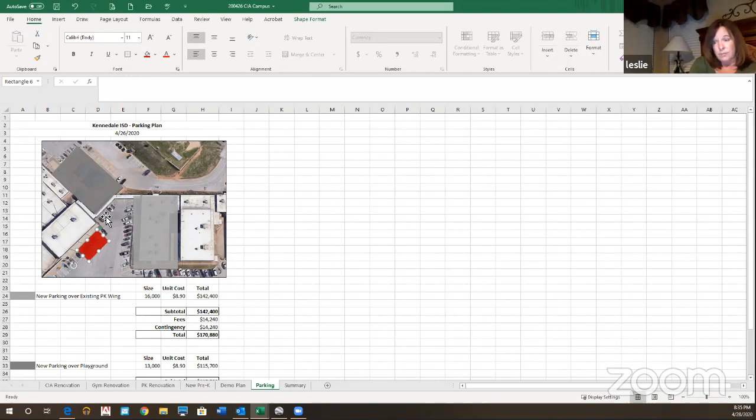Could you kind of enclose that area right there where you added green space? I mean, I know we're in the weeds, and that's where the drain is. That's what makes it fun. Teachers are gonna holler if we make that any smaller, because it's small now. That's why they go up to the field. Well, here's the one thing we're trying to avoid.

Let me see if I can help you out here. But if you have that other parking over there, then you might not need that part. You could take that parking away. If you can see this, right about, where'd it go? Sorry. Right there, it's a storm drain. That's where all the water is going.

So I'm trying to get out of this drainage swale here, and I believe there's a break right in here. I want to be on this side of it. There's also a substantial drain on the other side too, further up, and that's the one that stinks so terribly when we get a nice rain. There's a drain to the north there, this way. Yeah, it's located just past the canopy and toward the building, right there. Right in here. Yep, yes, yes.

It's a grate drain. I mean, literally, it's a grate drain. A kid could fall through if he's small enough. Oh, Lordy, okay.

Let us play with it. For clarification, yeah, that's fine. I mean, we can, just to get clarification on what you're asking, basically I think what Robert's putting there is just the play structures in the red box. And you're worried that we don't have enough ground around there. You want to move that whole square footage over to the side. Is that what you're saying?

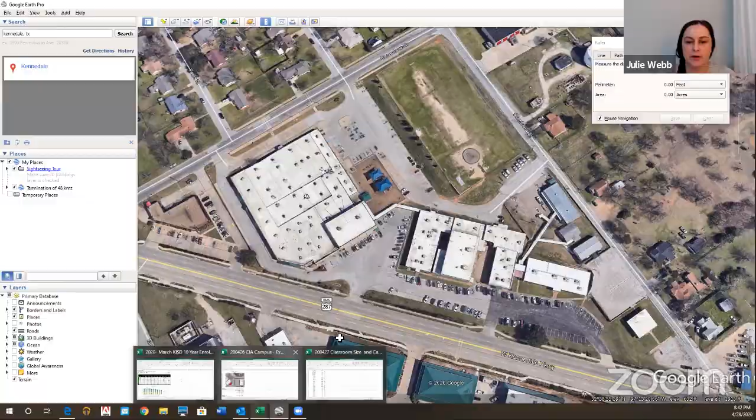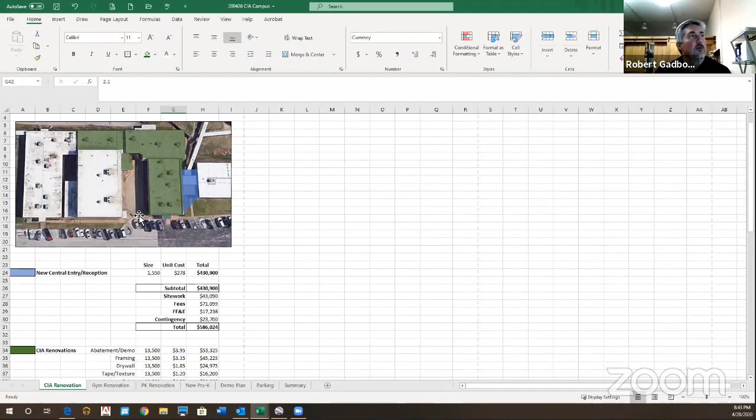This number here for the new addition would probably be on the order of $100,000 to $150,000 just to clean up that challenge in the middle. There's nothing about any of that that's accessible. We'd also have to address most of this sidewalk along the front of your campus, which is not compliant—you have steps and changes in grade and slope that create challenges. You also have issues here, and egress issues in the back. So there's just a combination of things you're still looking at.

Again, this is just the access points we're talking about. We're not talking about the restrooms. You have door hardware issues. You have threshold issues on some of the restroom locations.

I was telling Mr. G and Ms. Mode, there's things you can do under the auspices of maintenance, if you will. But once you start moving things around, then you're talking about submittal to TDLR for accessibility review. You're talking about submitting it to the city, that's driving a lot of the design criteria for your roofs as well. The codes they've adopted are going to require you to let the dominoes fall. And that's what we tried to present in as pragmatic a way as we can.

You can look at the numbers, moving the walls and things like that. Yes, it's substantial, but reassessing your thermostats, your light switches, your ductwork, your diffusers, your returns, so on and so forth. It's just all part of fixing something that's just been there a while, and your guys did a good job trying to clean it up, but functionally, I think the programs have grown as well, which is a good thing. But you can take a piecemeal approach to addressing one thing at a time.

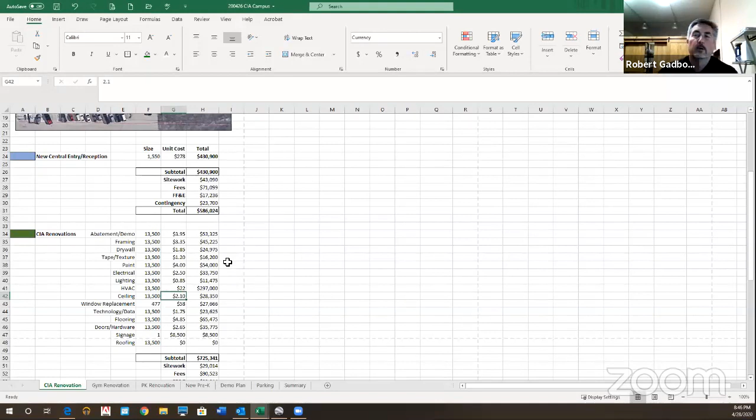So, Robert, can you scroll back up to the probably picture? Now that we have it on recording, we're going to have that complaint.

But one other thing about that is, are you saying that would be like a central entrance? Because right now going into the administration, we have a secretary, and when you go into the CIA, we have someone there greeting them. So that would put that one entrance for both buildings, and then that would be one area where they'd either direct them to the right or direct them to the left.

Correct. Yeah, I'm going to speak up here. By having this, if you see, I don't have the cursor, but that sidewalk leading up to that blue thing right there, that is all level. And so that is on one level right there.

Now, when you get inside, this would be the reception area as you walk into this blue area. And then what you do to affect that grade from the building on the right, which is the admin building, down to the CIA building, that would be adjusted inside this building to accommodate people so they can facilitate or access both buildings. And I think putting that together with the reception area would be good, and that would make one person right there secure, putting all that in place.

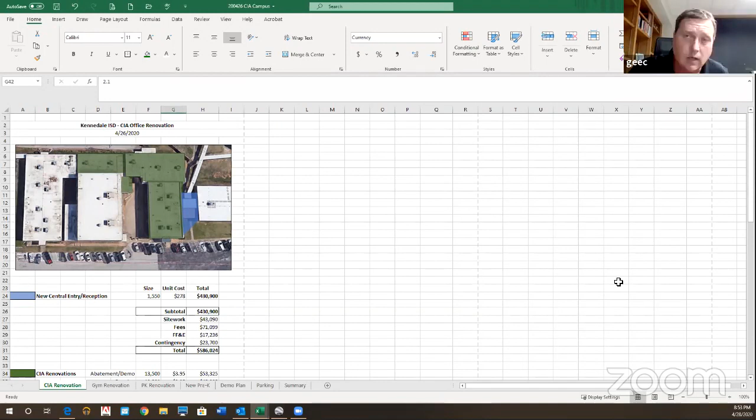Elaine, do you have any sort of report on, besides the roof, on things that we need to change? We've got a lot of things that come down to wants and needs. We have a lot of wants. We do have some needs. The needs that I would say at the campus level, as far as...

You would say a renovation of some sort would be the safety vestibules, to block those entryways going into the campuses. But as far as classrooms and stuff like that, we've pretty much accommodated what we can accommodate there without building new buildings and stuff like that.

And I totally get where you're coming from on the perception there. That was one of my concerns about bringing this forward. Again, we can do that in stages too. Maybe we do some of it in-house, and some of the things that happened when we remodeled it before.

We've got, as Robert stated earlier, some crazy wall configurations and lights and stuff. Some of those things we can fix in-house, but we do need to find a way, especially for our special ed folks who are in that back corner, to move them to the front, to give those kids and those diags the privacy in the areas. I think that's really important.

The ADA issue is a real concern to me now that I really see it, because right now any entrance, we're quote grandfathered in at this point. But if you look at any of the green area, and even our building, the admin building, we've got access issues. So whether we address just the access issues - the thought when we were talking about this is, we're going to have this building ripped apart because of the roof.

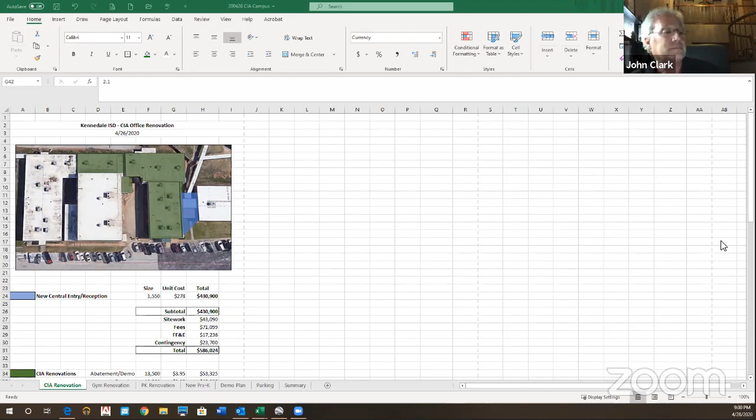I don't think it was that high. 2176 is Delaney and the CIA. Arthur would be another 9. And if we do some of the stuff Chad's talking about on CIA internals, it adds up to 900,000 plus a little bit. We're at $5 to $6 million. Does Jimmy have the money? Oh, that's me, I keep looking for that magic money tree.

I mean, that's just a lot. That's a lot of money. I agree, yes it is. We're looking right now at how much scope do you want to sit there and cover and address, and you know, the roofs are what they are.